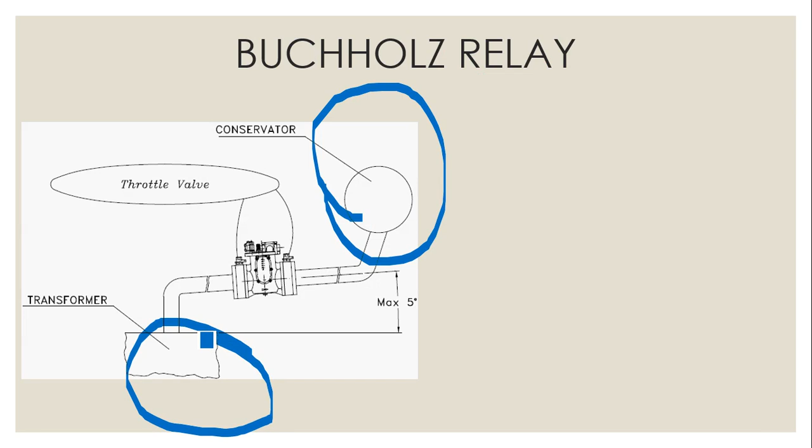So we will be seeing where is the location of the Buchholz relay. So let us say this is the conservator tank and this is the transformer main tank. In between both the things, that is the location of Buchholz relay. So the Buchholz relay is located in between the conservator and main tank.

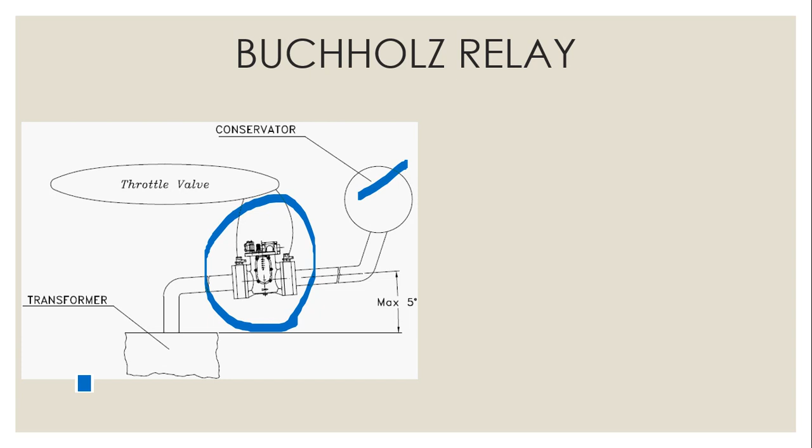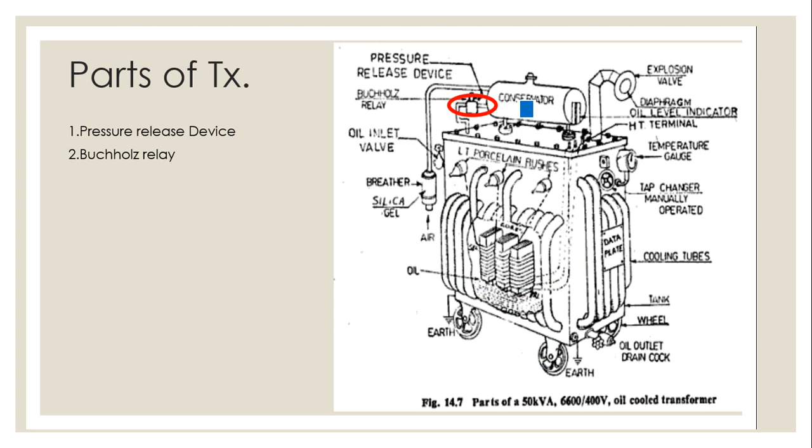In the previous slide also we'll be able to see where is that item. So this area is the main tank and this is the conservator tank. In between that this Buchholz relay is connected. And this is almost the physical appearance of a Buchholz relay. Depending on the capacity it may vary.

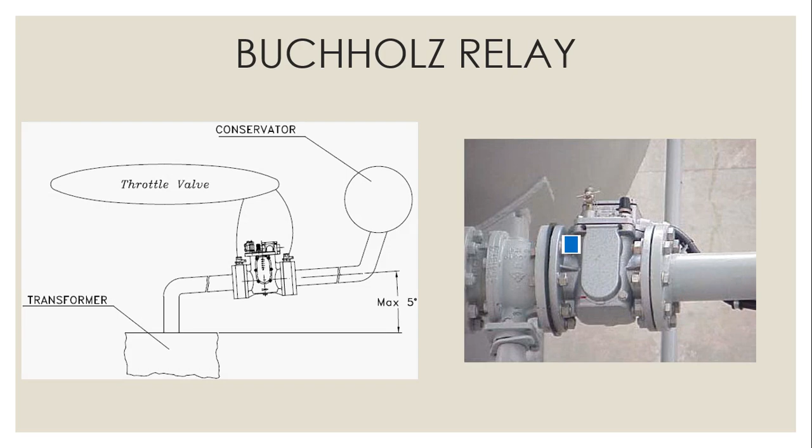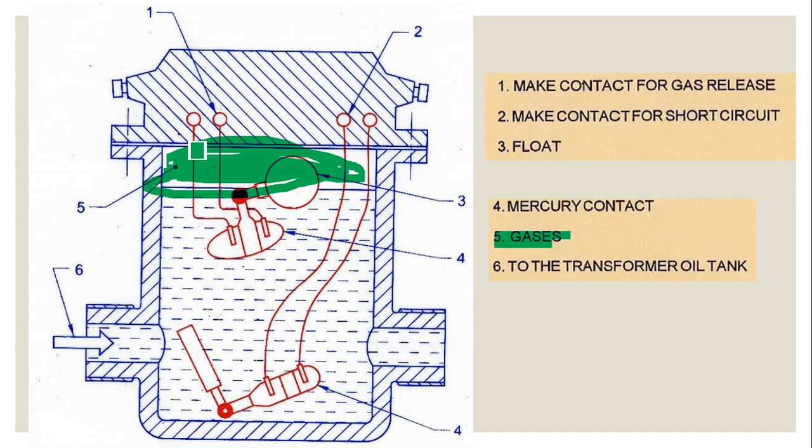And the mercury contact we already told, this is the physical mercury contact. You can see liquid mercury is available here and physical metal contacts are available. Normally they are not closed, and they will be closed under some condition. That condition we will be seeing. Next, fifth one, it is gases available in this free space. Normally gases may be less, but due to some conditions gases will be filled here. When that gas filling happens will be told later.

And next is six, going to the transformer oil tank. So you can see this is the way going to the transformer tank. The transformer main tank is in the bottom part, and the transformer oil is connected, Buchholz is connected from that, and it is going to the conservator tank upwards. So the conservator tank is in the top part, and in the bottom part the transformer main tank. In between Buchholz is available. So this is the physical construction of a Buchholz relay.

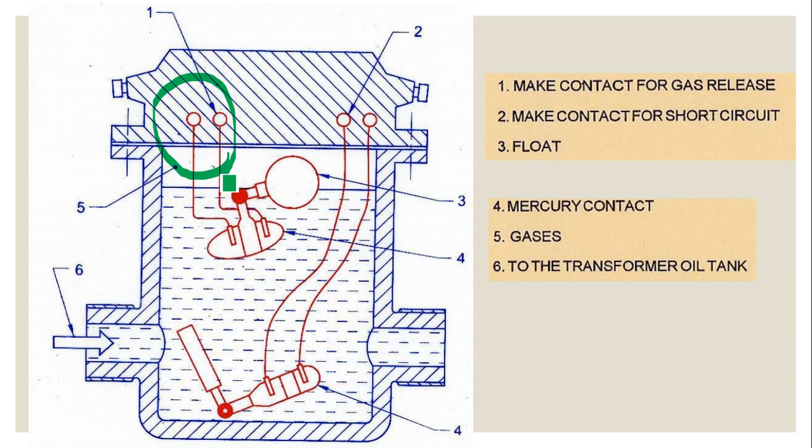So the Buchholz relay will be giving you two conditions of operation. One condition is under gas formation, and the second condition under short circuits. What is happening under gas formation? These mercury contacts will be shorted through mercury like that. You can say now it is contacted. Under normal condition it is like this. Only one contact may be in contact, and under some condition it will be creating contact with the second contact also. So this is the contact getting closed, and similarly this is the second point.

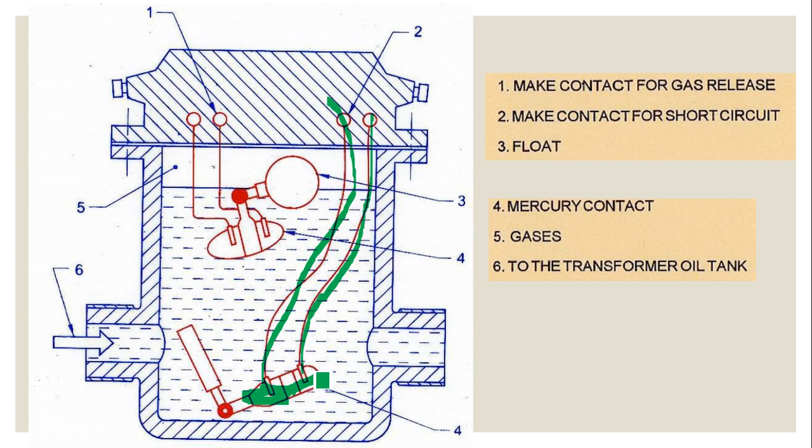This point is not contacting the second part. It is independent. The circuit is open now, but under short circuits and some other conditions this will be closed. How it is closed will be told in the operation part. So this is the construction of Buchholz relay.

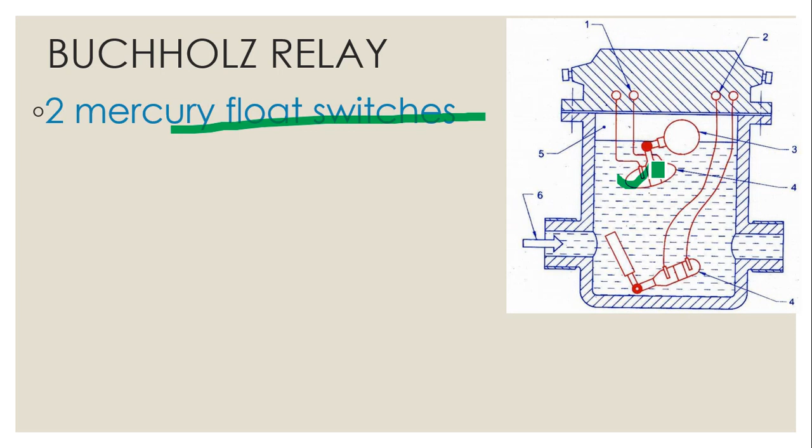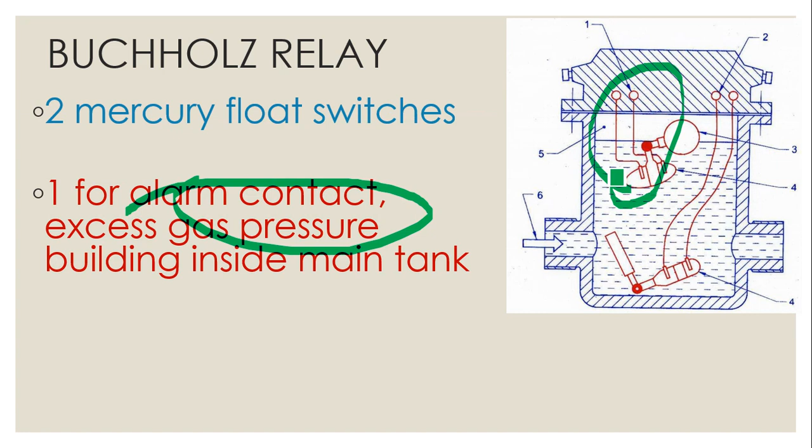Two mercury float switches are available, one here and one here. Two mercury weighted contacts, and one is for alarm contact. Generally, for the gas-related item, it is known as alarm contact. Alarm contact means that you may have some alarm available here, and that will be connected in series to these coils. So if you have operating voltage here, what happens? Some voltage is there, and you assume that is the alarm, and when the circuit is closed, the alarm will work. So that is known as alarm contact.

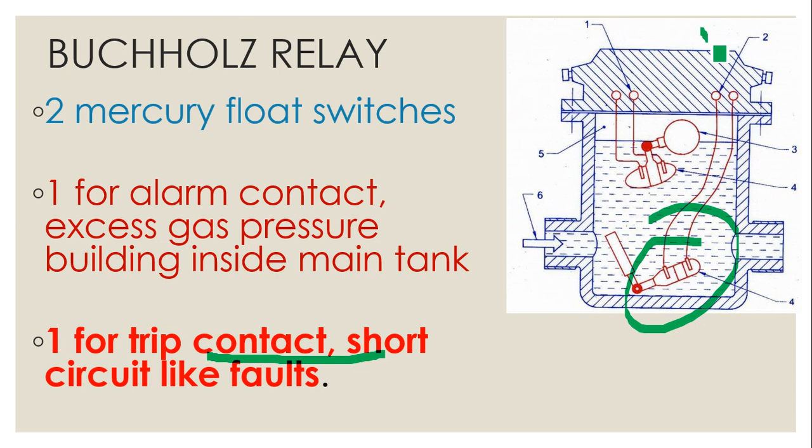And next is trip contact. It is for short circuit fault. So this is the short circuit fault contact. Only thing, this area will be closed. Now we are going to discuss the working of that item. So you can see the picture. This is the main oil transformer, the main tank of the transformer, and this is the conservator. In between, our Buchholz relay is available. So from the main tank, through the Buchholz relay, it is going to the conservator.

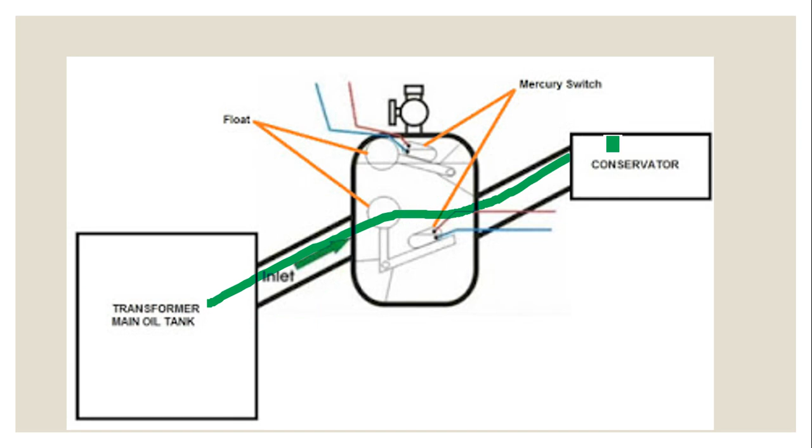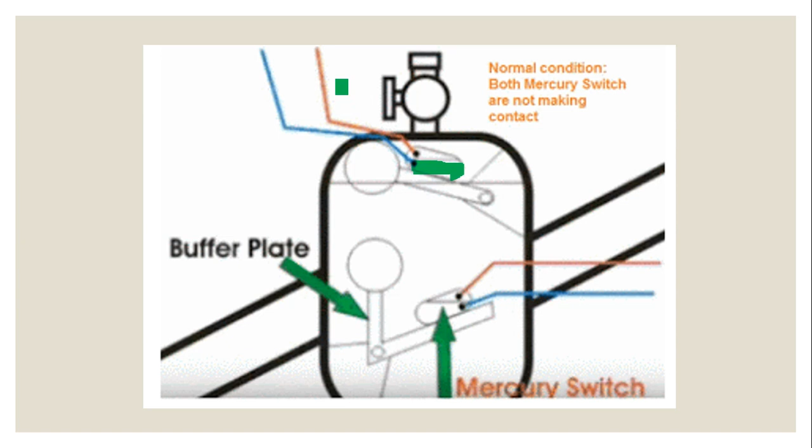Under normal conditions, both the contacts are open. You can see under normal condition both mercury switches are not making contact. You can see the mercury liquid is floating like this, and it is not making any contact to both wires. It is separate now. Now the first condition: under some minor fault, some minor overload or overheating, inside the main tank the transformer oil will be converted into a small amount of gas. Gas will be liberated like this. You can see gas bubbles are coming from the main tank, and these gas bubbles will be collected here.

After a particular amount of gas, a small pressure will build up here. Due to that gas pressure, what happens? This contact will be going down due to the gas coming in this way, and this is the float. It will try to pull down. When this is pulled down, these contacts will get shorted through the mercury, and when it happens, it creates an alarm. So this is the alarm circuit of the Buchholz relay. That's the first condition, a minor fault. If small overloads or small overheating are there, it will be working.

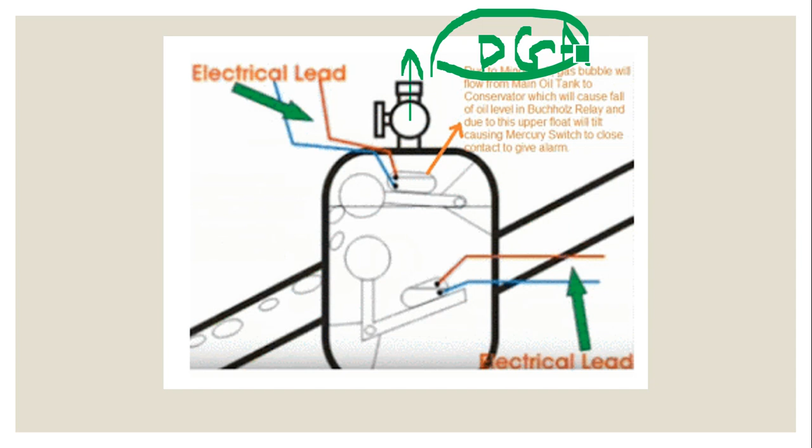And under excessive pressure, we'll be able to open up this pressure device, get the gases here, and collect them. These gases are known as dissolved gas. The dissolved gas can be analyzed and tested. It is known as the dissolved gas analysis unit. And by analyzing the dissolved gas, the type of problem can be found out. Dissolved gas analysis. And this is for the first case, minor problems.

And if it is a major problem, a heavy short circuit suddenly in the transformer, it will create a very high temperature inside the windings. It will create a heavy amount of oil movement from the transformer to the conservator tank suddenly, because of the heavy expansion of the oil due to this short circuit. It will suddenly thrust to the conservator tank.

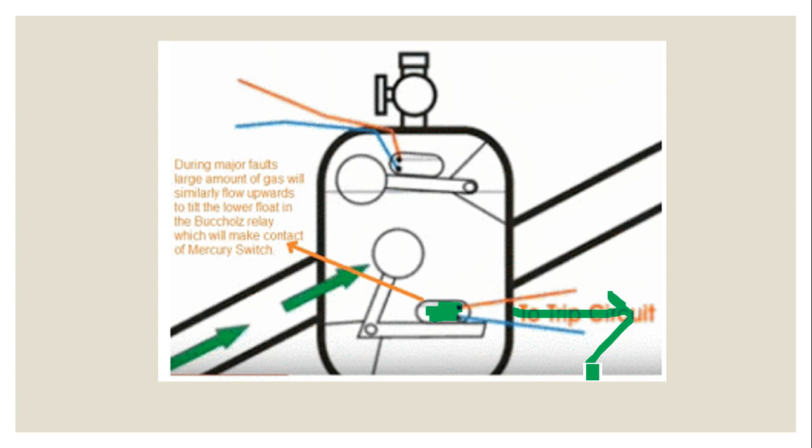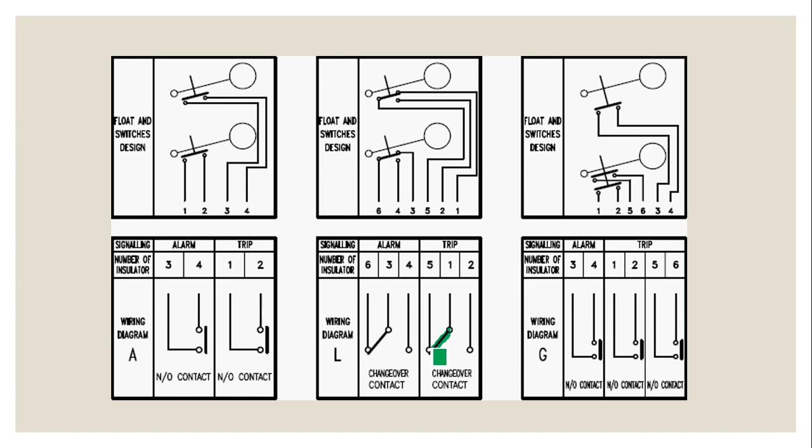So the same working only, but you will have change-over contacts. And similarly, we'll be able to have additional conditions: normally open contact only for trip, and closed contact for alarm, depending on your requirement. Here only one NO is available, but in this case there are 2 NOs available, one for alarm and one for trip. For the trip, there are 2 contacts available.